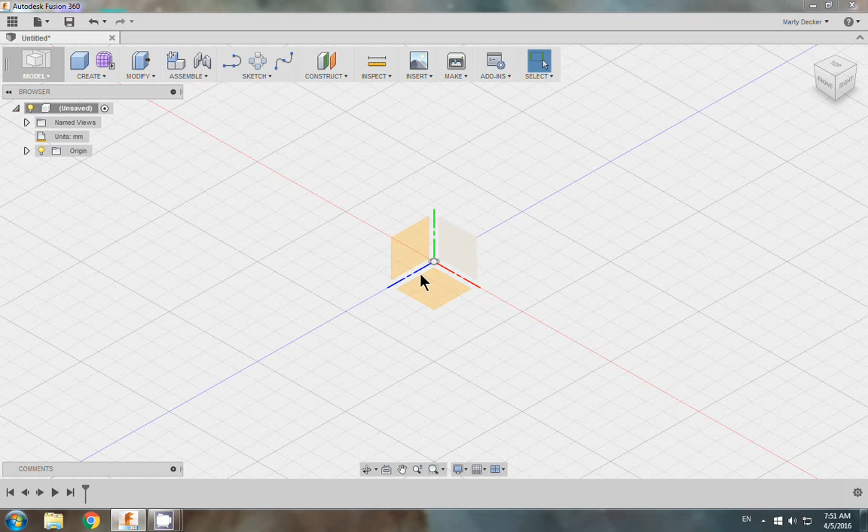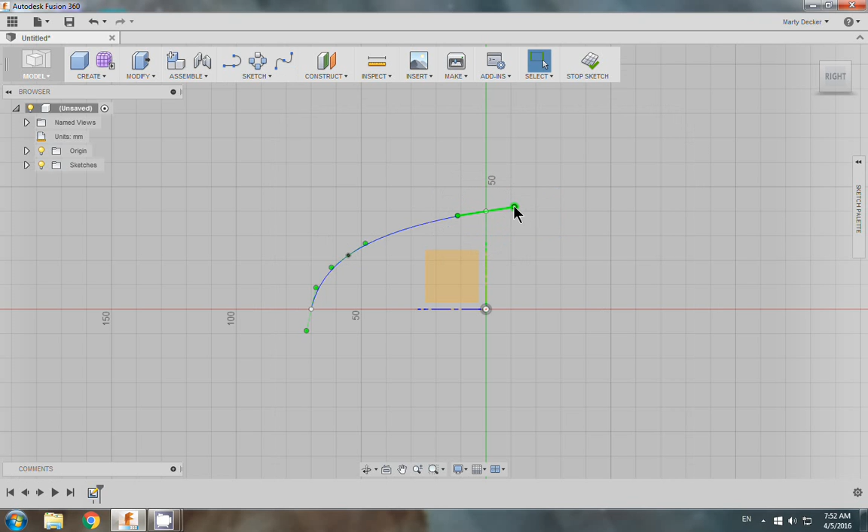And I'm going to start with a sketch using a spline, and I want to work on, yes, this plane. I'm just going to make a quick shell here for the turtle, and I'm going to right click and say OK, and I'm going to fix this so it is nice and straight across. Okay.

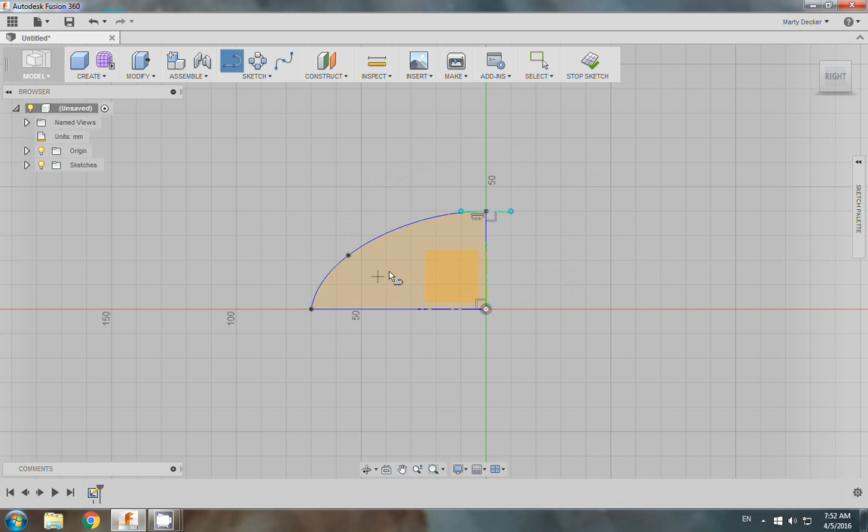Continuing in this, not stopping the sketch, I'm going to go over to make just a straight line to here and to here, and now I have a shape. Alright, I'm going to stop this sketch. I'm going to take this sketch, let's see, modify, create a revolve. I'm going to revolve this sketch around,

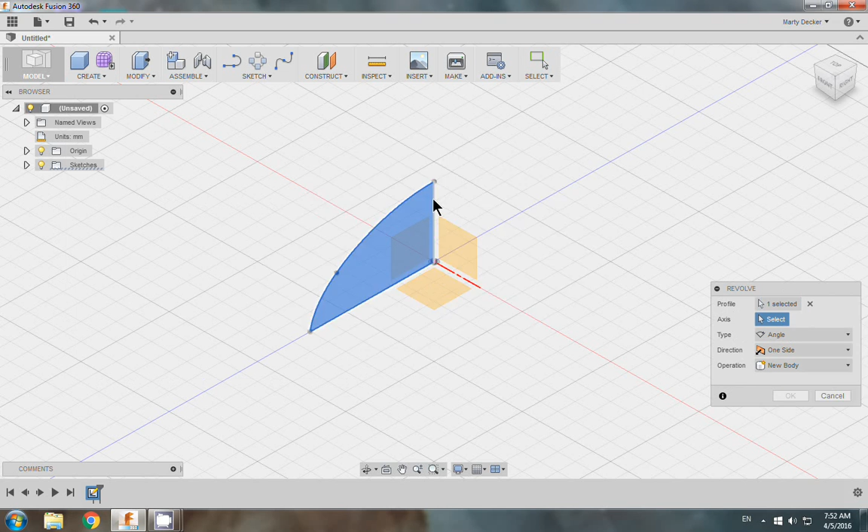pick this profile is this here, and then the axis is this one here, and this thing sweeps around and makes a nice dome. So you've got a solid dome. Let's click OK here. Now you've got a nice solid dome. Okay?

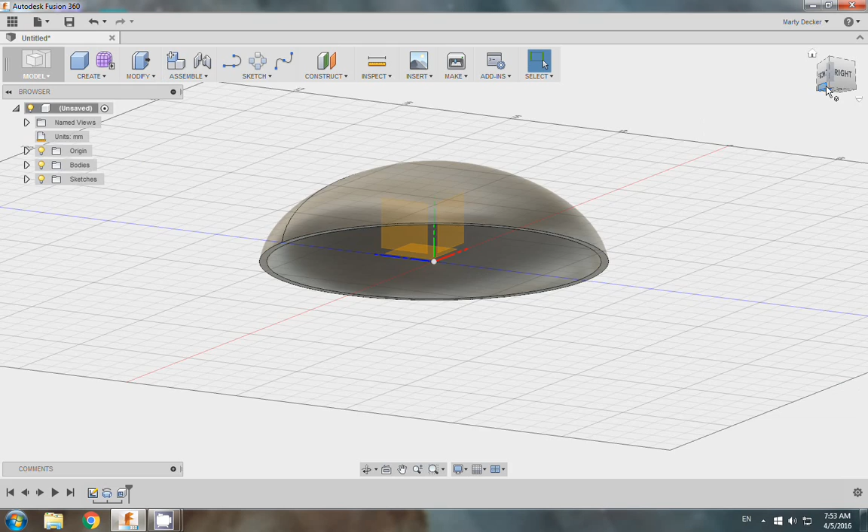Alright, I'm going to take this dome and make a shell out of it. So I'm going to modify shell and just click on this bottom here, and let's make it 3 millimeters thick, and OK. I've got a nice empty bowl. Voila. Alright, let's go back to our original position.

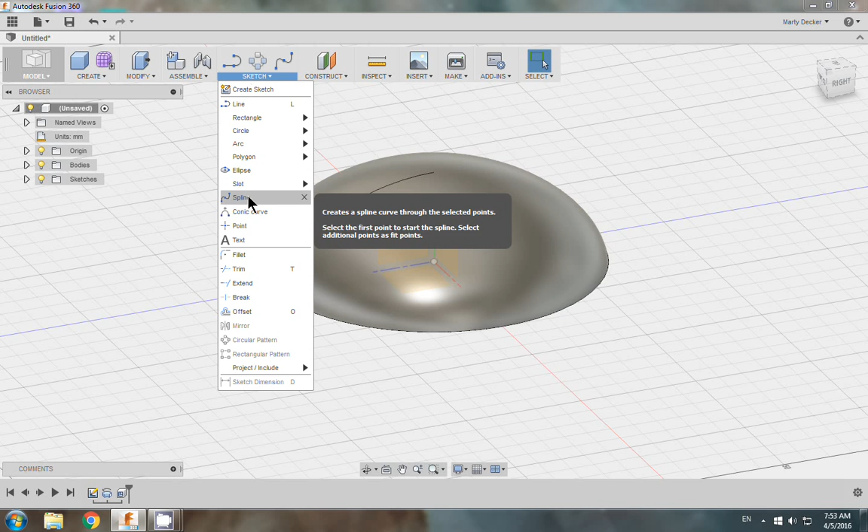Now I want to carve out a space for the head and the tail, front and back. So I am going to sketch a spline using this plane right here. Okay, so it revolves around, and I want to keep the body visible so I can tell where I am making this line here.

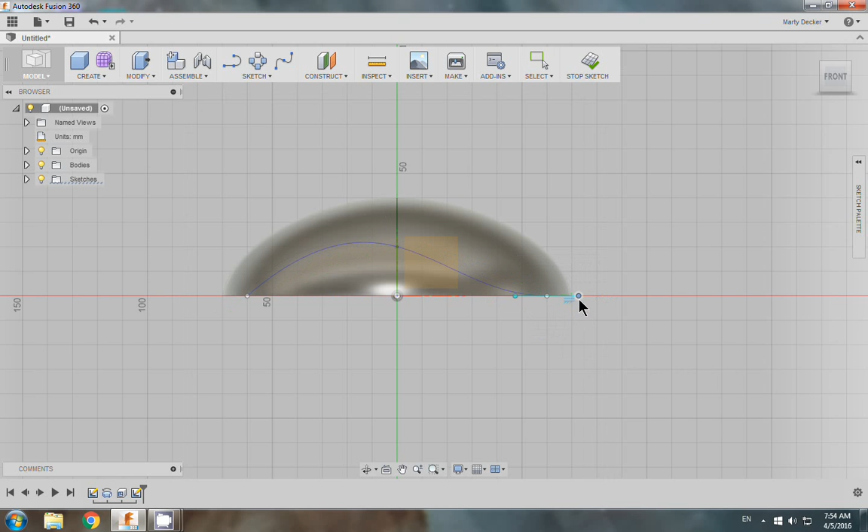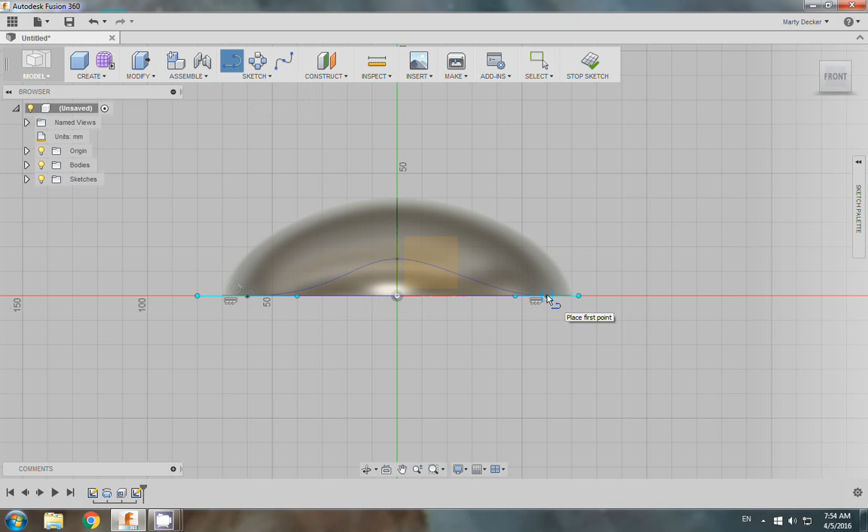Alright, now I can edit this. Okay, now I want to edit this to, there we go. Perfect. And maybe lower this a little bit, it's too high. Alright, before stopping that sketch, I want to close it off. This point and this point, and make a nice solid. Let's see this body. Hide the body, and we have this nice completed sketch there.

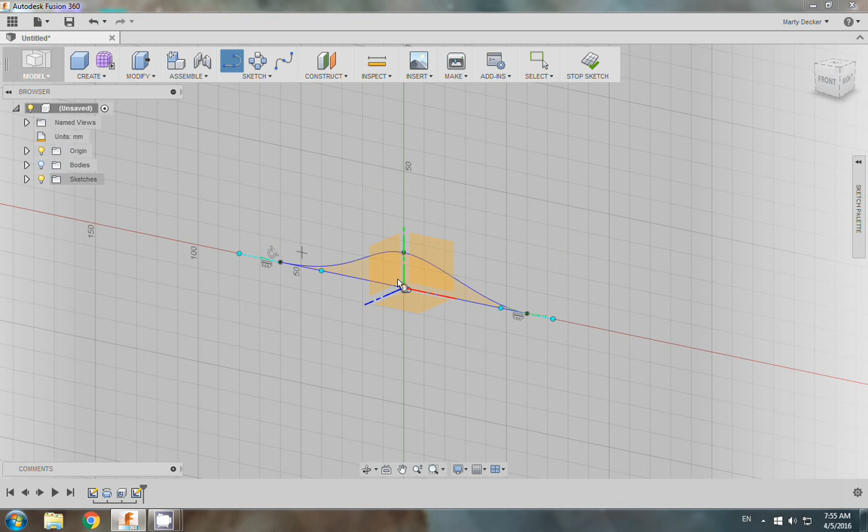Now we're going to extrude this sketch. If you see, I'm going to highlight the body again, and I still have that sketch open. Hide the body for a second, and let's press pull, pick it, let's say not just one side but symmetric. Alright, I'm just going to grab this sucker and pull.

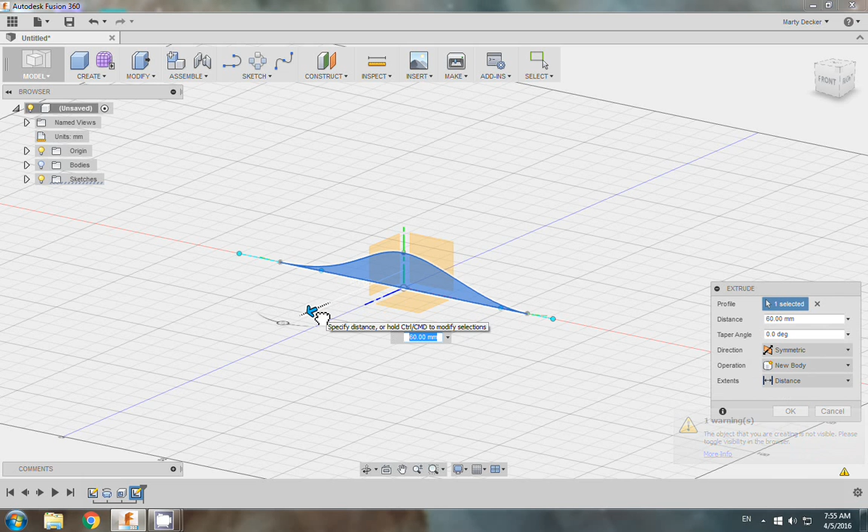Highlight the body again. Alright, so now I know I am all the way through, and I want to cut the part out from that shell. So OK, and now we have the shell cut out for the front and back. Now I want to make a nice little lip around the shell.

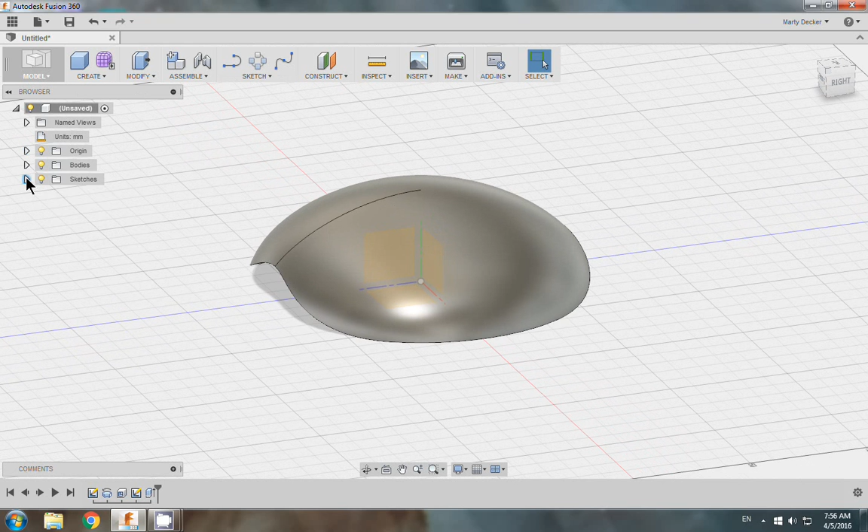So I am going to try to explain how I did that. I'm going to sketch. I want to see the original sketch I had, which is that shape right there, so that I know exactly where to put that little lip. I'm going to put a point right at that.

Pick the plane that I'm working on, yes. Put a point right there. And for later, I'm also going to put a point right here, and then a point up here. Now I want to make a circle over on this point right here. There we go. Click again on the left click in order to finish that, and stop sketch.

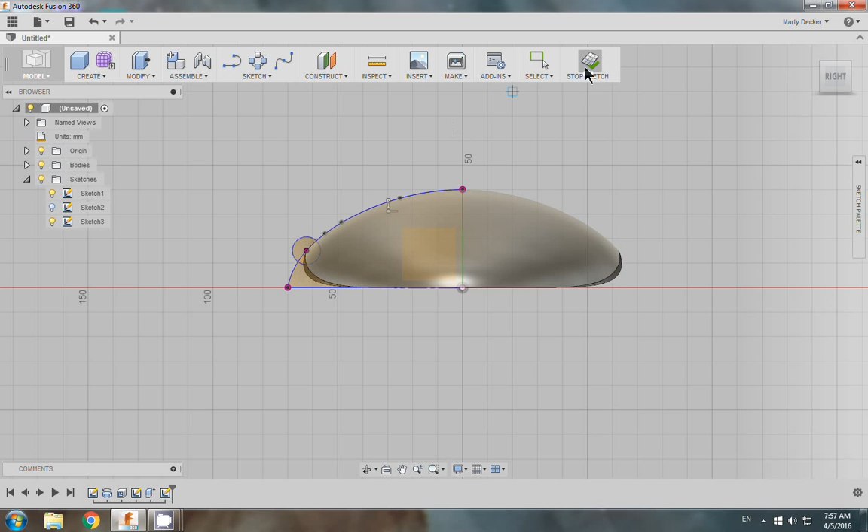Alright, now we're going to go over and create a sweep. It is going to ask me over here, single path, yes. Profile is this circle here. Excuse me, I want the entire circle. Hang on. Cancel this. I want to hide the first sketch. Okay, I just want this. So create, sweep, pick the profile.

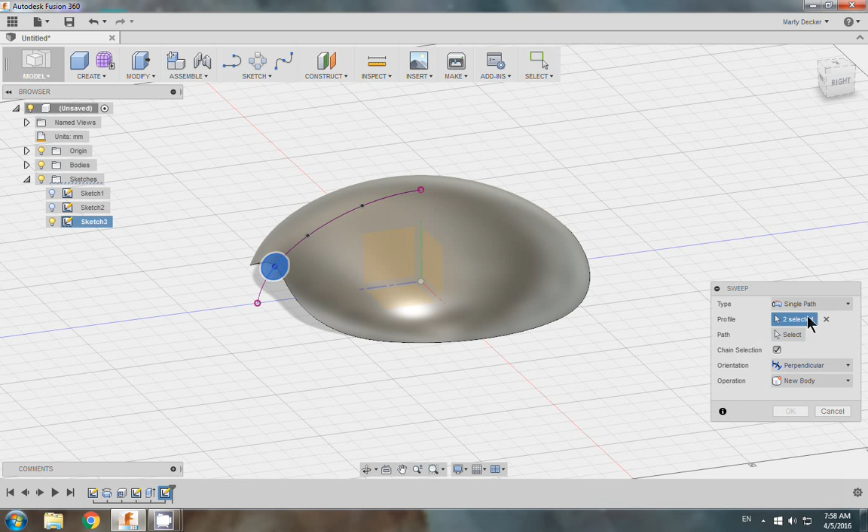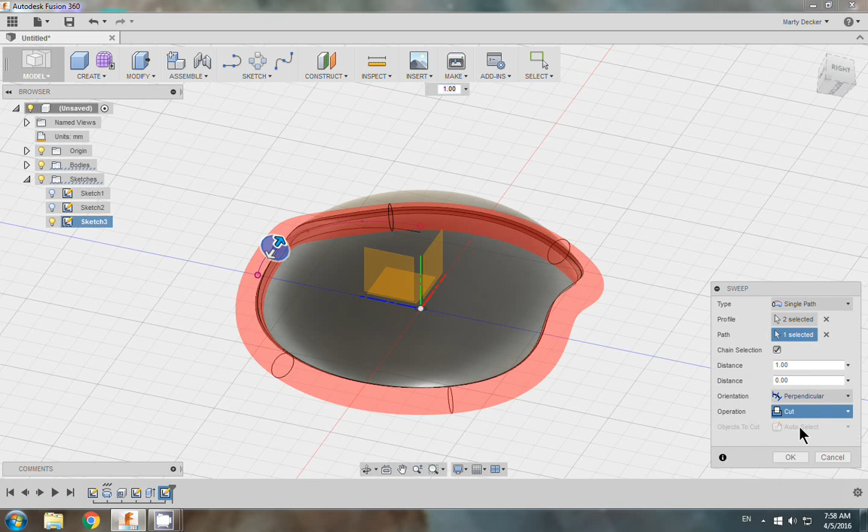And now the path, and I'm going to tip this upside down so I can pick the outer portion of this turtle shell. There's my path. There you go. Completed the sweep. And I don't want to cut it, I want to join. And OK. There we go. Now we have a nice fat lip around that, just like a turtle shell.

And now we are going to cut out our holes in the turtle shell. So this is why I made those points on the plane earlier. Highlight this sketch so you can see sketch 3 are the points here.

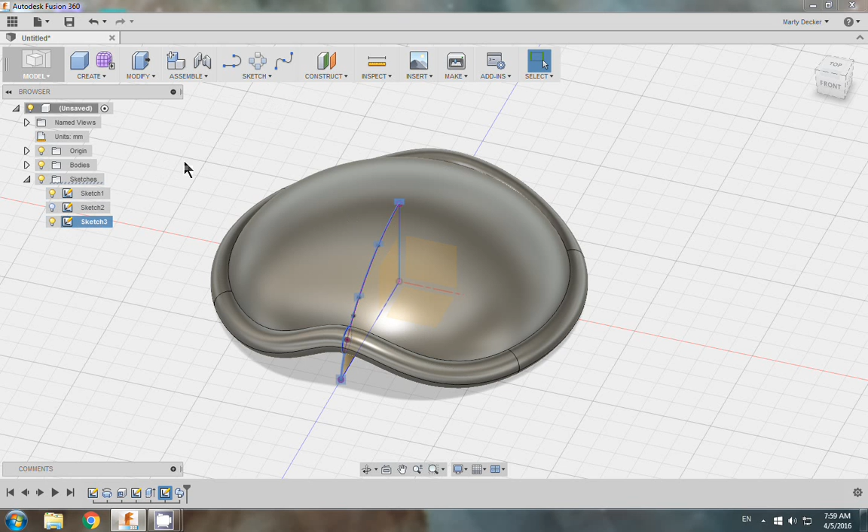Construct a plane tangent to face at point. The face is going to be the turtle shell. The point is going to be one of those little points right here. Select a point and a face. There we go. Now we have a new plane.

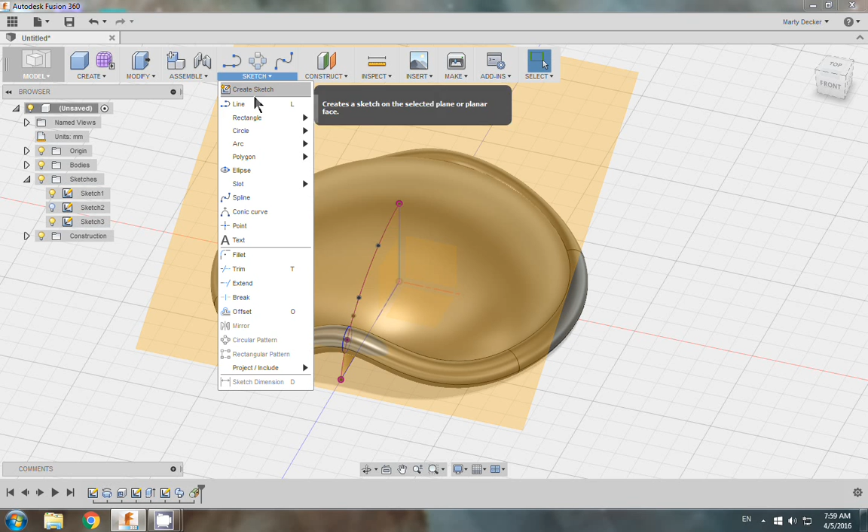And I'm going to sketch a polygon on this plane at this point right here. And I want it to be a 5, pentagon. That is way too big, so let's see here. That's good size. Complete that.

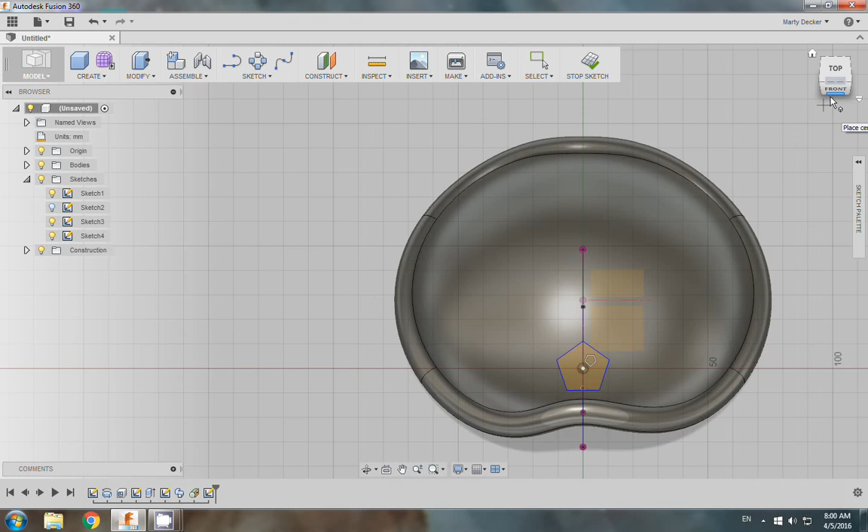Now let's see. As you can see, zoom in here. I want to show you where that polygon is sitting. Right on top of that turtle shell. Alright, so we're going to take this, stop that sketch,

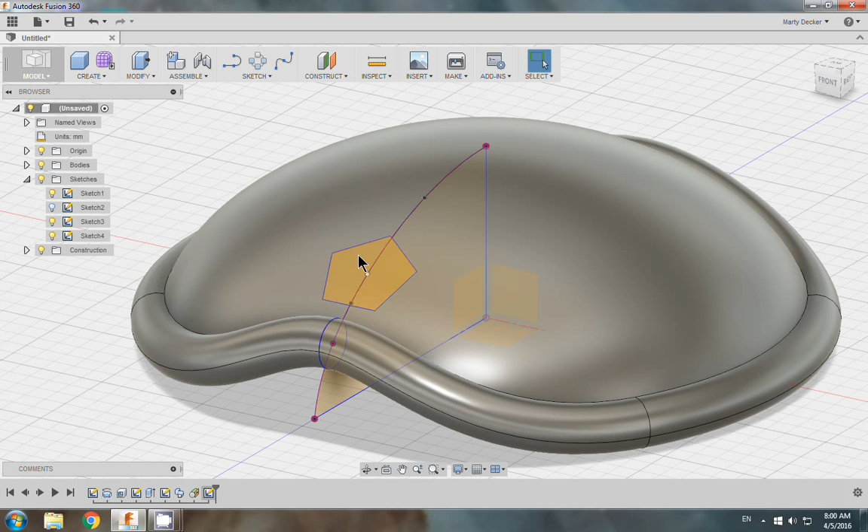take this body and press pull. Let's go symmetrical again, actually one side, but take it down into the shell. Like so. And yes, I do want to cut, so okay with that. Alright, we have our nice shape.

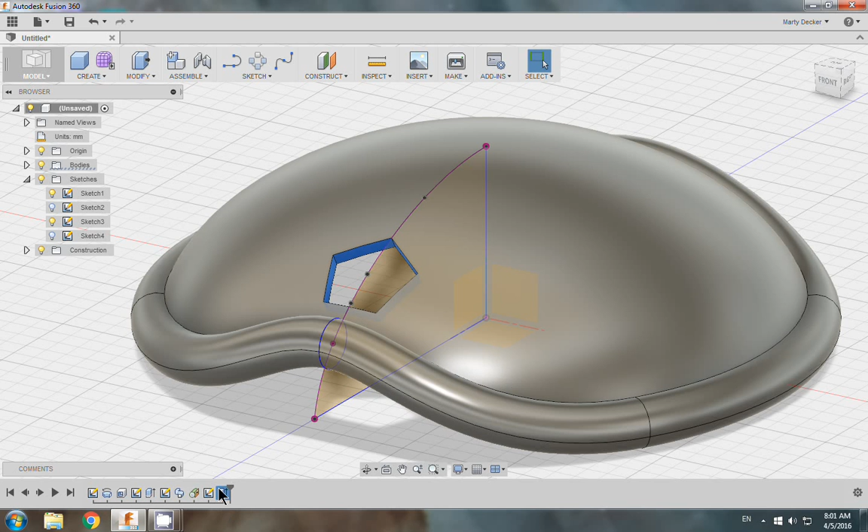Now I want to copy this all the way around the turtle shell, so I'm just going to highlight that extrusion down here. There you go, it highlights it for me. And then create a pattern. Circular pattern made out of that. The object is selected and the axis is going to be this one here.

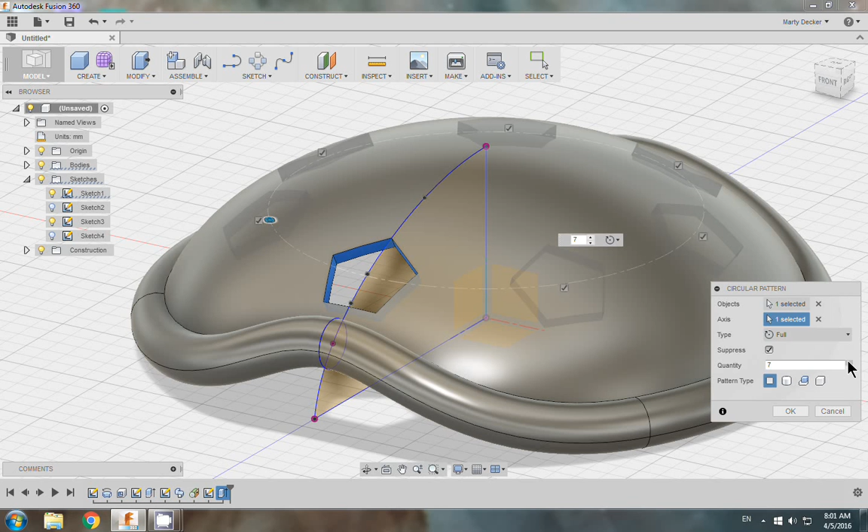There we go. Automatically sets it at 3, but you can increase to as many as you want. I'm going to put 7 or maybe 8. There we go. Okay. There you go. I copied all of those.

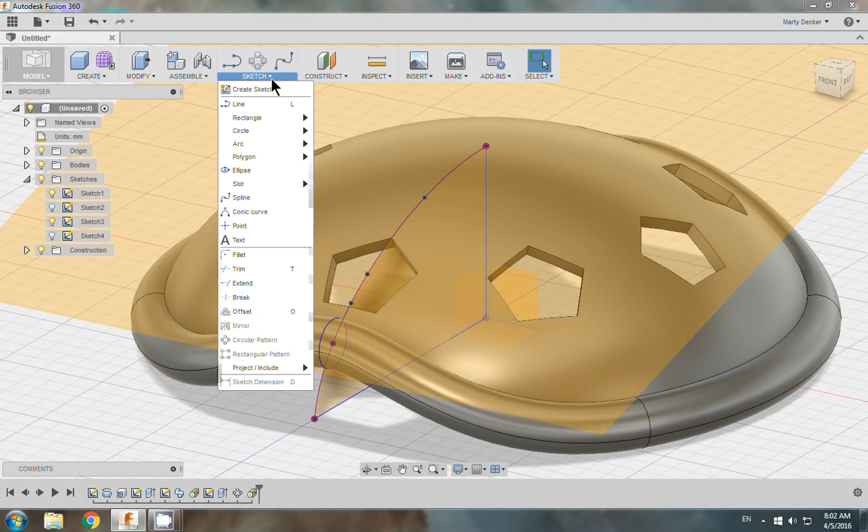Let us repeat. Make another plane at this point here. Construct plane tangent to face. There is a point and there is a face. We have a new plane. We are going to sketch another polygon at this point here. I'll use this plane at this point, or at this one. Let's go at this point here.

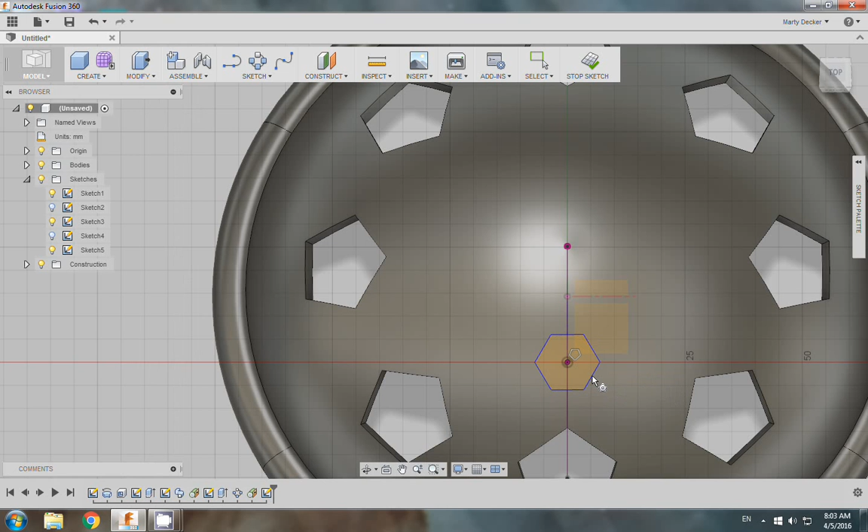No, I want to do it. No. Pressing the escape button out of that. I'm just going to do it right here. Sorry. Alright, I lost where my sketch polygon. Well, let's just keep it at 6 sides, that's fine. And click again on your left click to finish that.

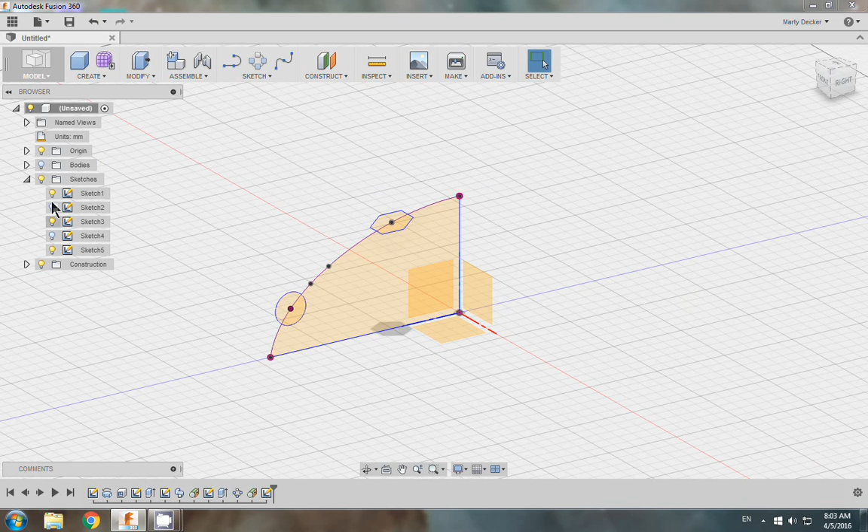Let's see where this puppy is. There we go. So we're just going to extrude that again like we did with the first one. Stop the sketch. I'm going to hide this body for a second. I want to select this. Hide that sketch also.

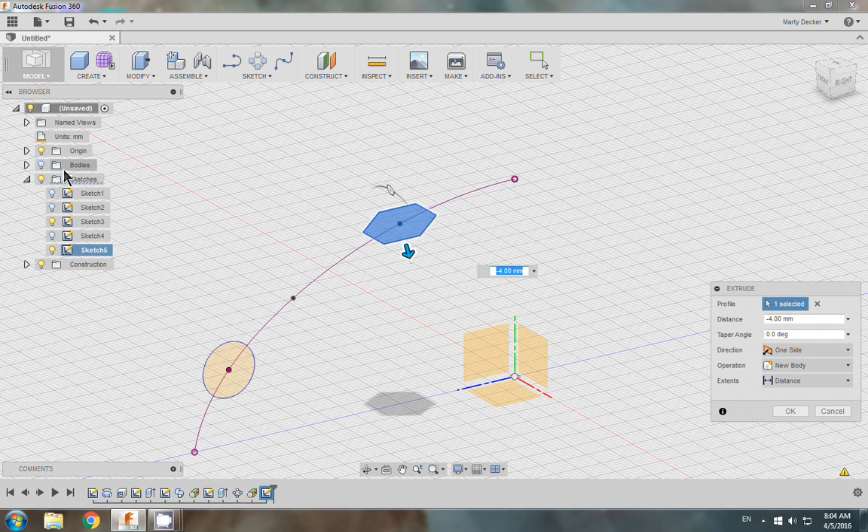Select that whole thing there, and press pull one side, and instead of up, I'm going to take it down. We know the thickness of our shell is 3 millimeters, so I'm going to go beyond that to 4. Let's highlight the body again over here on the left side. Is it all the way through? Make sure it's going all the way through, and then cut over on the right side, and OK. Alright. There we go. It's cut all the way through.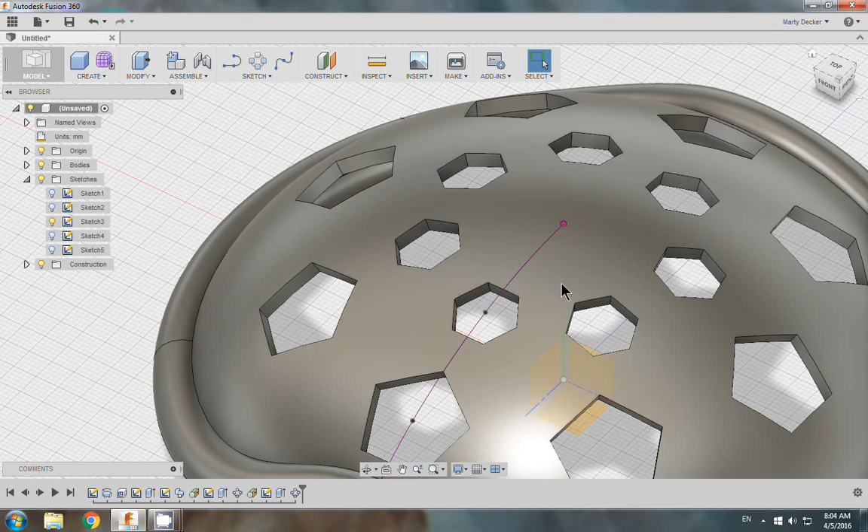So repeat the pattern, select the extrusion, create pattern, circular. The object is already selected. The axis is going to be this one here. And again, multiply by as many as you want. And OK. There we go. We have our turtle shell.

Hide all of the sketches so all you see is the turtle shell. Move it around, and there you go. Save your file and go home.